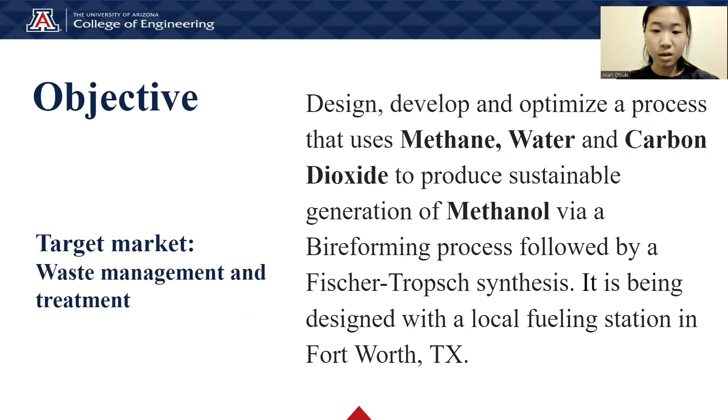Natural gas is primarily methane, a greenhouse gas that is harmful to the environment. We designed our process with Aspen Plus to synthesize natural gas into a useful and much less harmful substance, methanol. This is created via bireforming of methane followed by Fischer-Tropsch synthesis. The process could be applied at any landfill or livestock area producing methane. In-depth analysis was done for large-scale production in partnership with a local fueling station in Fort Worth, Texas.

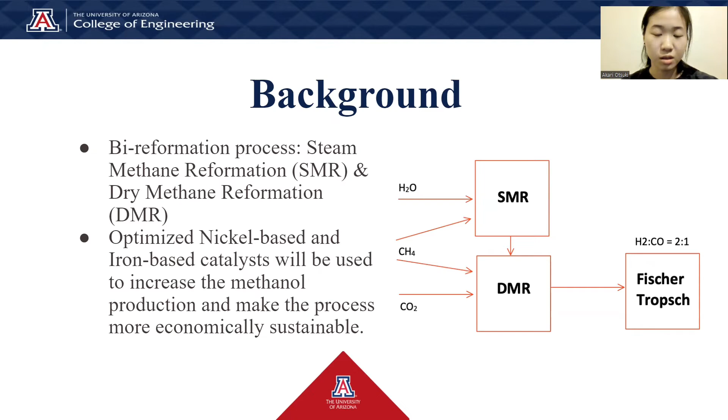Bireforming consists of SMR and DMR processes. Then the product stream will be sent to the Fischer-Tropsch synthesis. This produces syngas with a hydrogen to carbon monoxide molar ratio closer to 2:1, the optimal feed stream to Fischer-Tropsch gas-to-liquid synthesis. Optimized nickel-based and iron-based catalysts were used to increase the methanol production and make the process more economically sustainable. Here is our SMR, DMR, Fischer-Tropsch reaction.

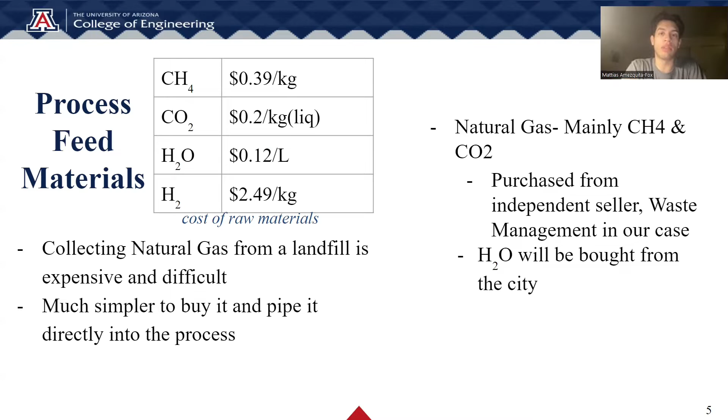These are the current market prices for our process feed materials, which are natural gas consisting of methane, carbon dioxide, and hydrogen, and liquid water. The water will be purchased from whatever city the process is being implemented in. Again, for our estimations, we're using Fort Worth, Texas as the location for all of the costing estimations. However, producing natural gas from a landfill is actually an expensive and difficult process. So for our project, we are planning on buying it and piping it directly into our process from an independent seller, which is Waste Management in this case.

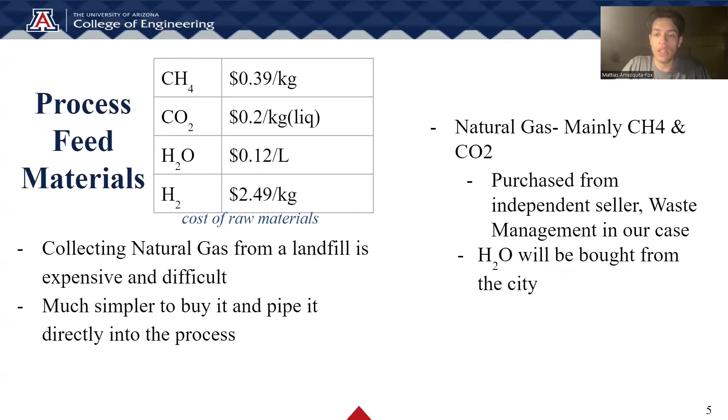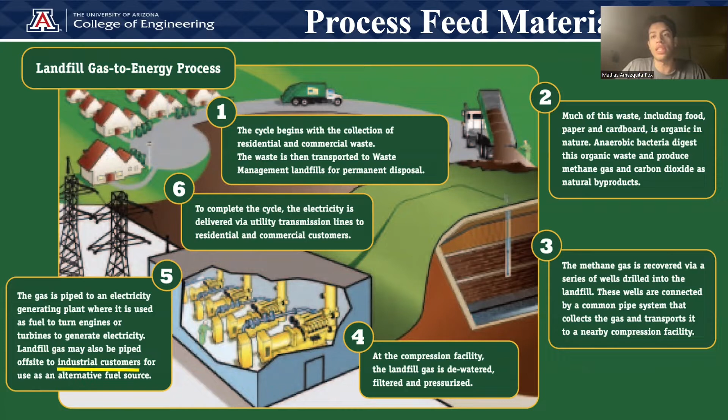There are lots of harmful natural gas collecting processes in the country, so we wanted to get our natural gas from a process that will actually benefit the environment. Waste Management has a program where they produce natural gas through anaerobic digestion of collected residential and commercial waste. Waste Management will take care of all the collection, all the digestion, and any post-collection processing required, like dewatering, filtration, and pressurization. Then they will pipe the natural gas directly to industrial customers like our process. This is how we ensure that our process feed is coming from the right place and will benefit the environment overall.

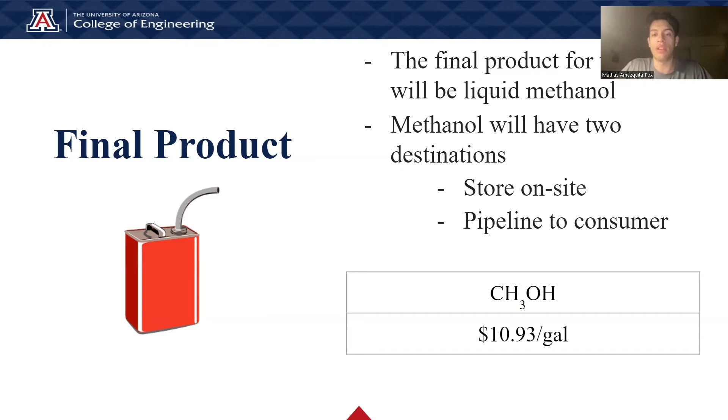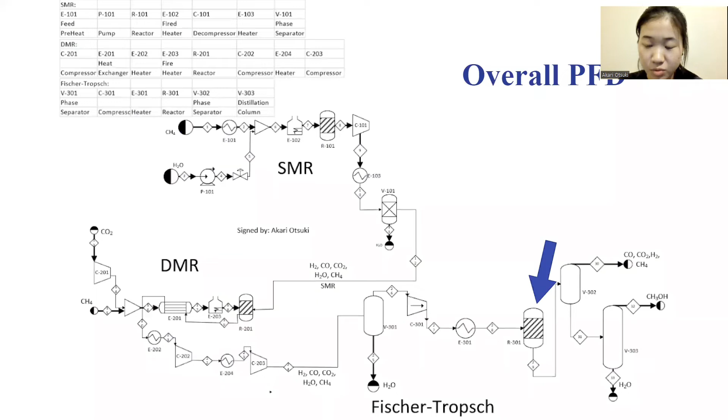Here is our Aspen flowsheet for SMR and DMR, and here is our Aspen flowsheet for Fischer-Tropsch. For the PFD, we have CH4 and water entering here and reacting in the SMR reactor here. Unwanted water will be leaving here, and the gas stream will be reacting along with CO2 and CH4 in the DMR reactor here. The unwanted water will be leaving here before reacting in the Fischer-Tropsch reactor here. The unreacted syngas will be leaving here, and the methanol and water will be leaving here.

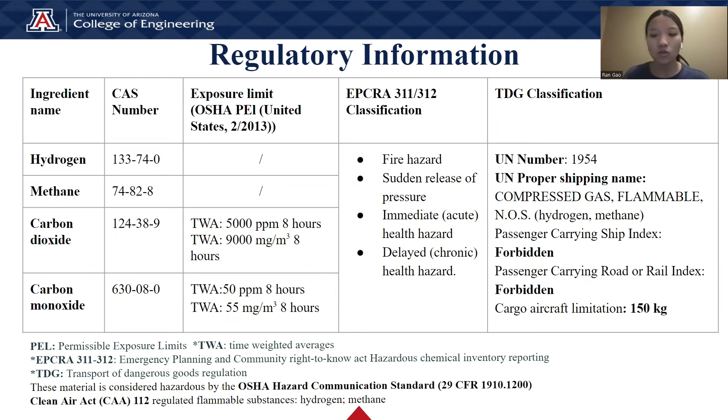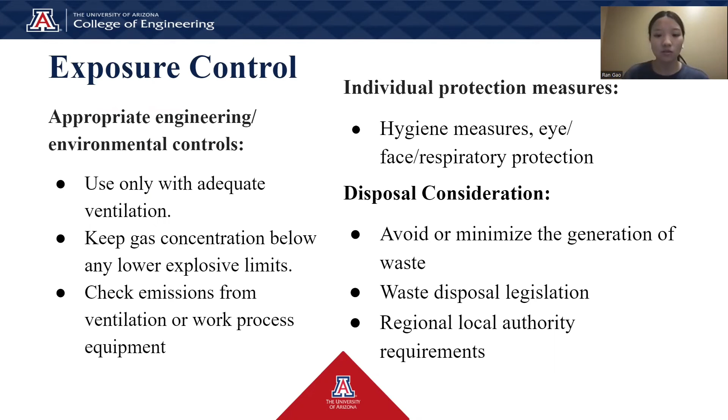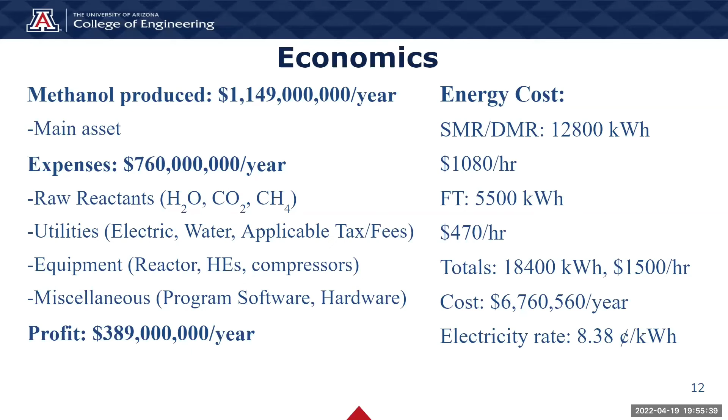Our energy costs are also one of our main operating costs, mainly the electricity. We reduced the electricity by about 1,000 kilowatt hours for both our Fischer-Tropsch and SMR-DMR processes. The cost per year of electricity is about 6.7 million a year. Next slide, please.